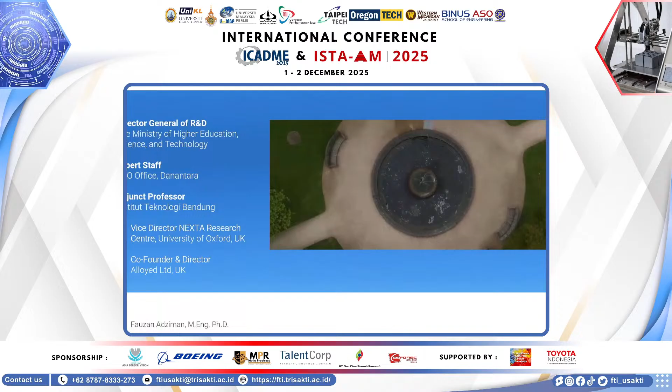I've also been working as an adjunct professor at Institut Teknologi Bandung for the last 8 years. And I could proudly say that I was appointed first by Professor Kadarsah, now the rector of Trisakti, when he was rector of ITB. It might be useful as well to explain that I co-founded a company in the UK called Alloyed, a company focusing on new discovery of materials, specifically metals, and also working deeply in the area of additive manufacturing. So this is a topic of my enthusiasm and interest as well.

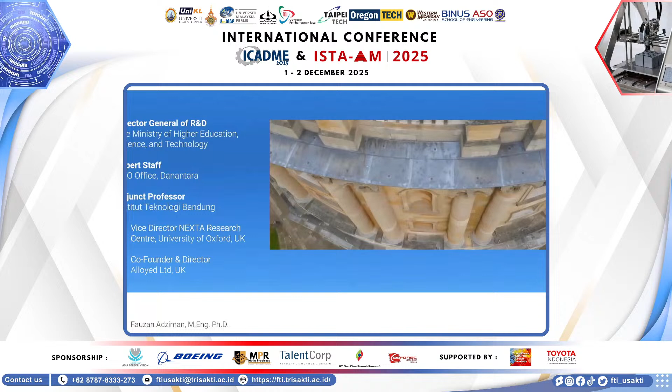So it is a shame that I'm not able to join, but hopefully next time, when the schedule is not clashing, I would surely like to have some coffee chat with everyone joining.

Let me start with just a key background why we think 3D printing is important. So 3D printing is identified as a technology that changed very rapidly and in fact could be exponentially. But I think at the same time, due to the rapid change of the technology, ideas, and also development of technologies itself, somehow we may be able to be part of the journey.

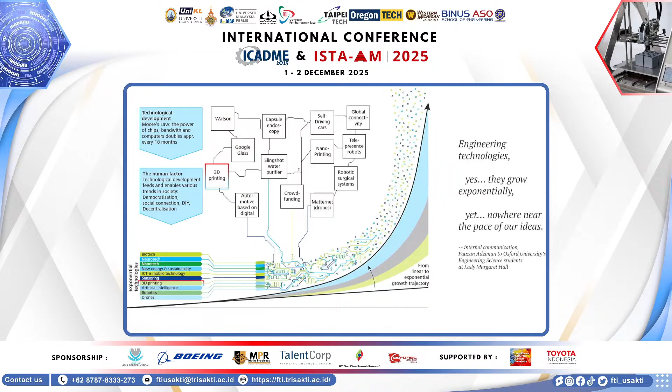So that is key why 3D printing or additive manufacturing could probably transform the way we do R&D. Despite on the application side we understand that in Indonesia it's not well used, especially for metals, the technology transfer and the skills that we could build through additive manufacturing could be impactful for the society.

And the way we see frontier technologies in Indonesia, especially in the development of the ecosystem, at MoHEST, our Ministry of Higher Education, Science and Technology, we built 4 key strategies. Again, we do have opportunities and also challenges at the same time. A key opportunity for Indonesia is by 2045, 65% of our population will be in the productive age group. Which means that we will have sufficient inertia to move our ship towards advanced countries.

But we do have a key challenge, especially on total factor productivity, which may stall the way we develop things if we don't strategically put intention and our policy correctly. So for that reason, what we are describing here is how we build Indonesia's knowledge-based economy. For so long Indonesia in the past was based on an agricultural economy, and now we are shifting too fast, focusing on services. So there is a big gap in between, which is manufacturing.

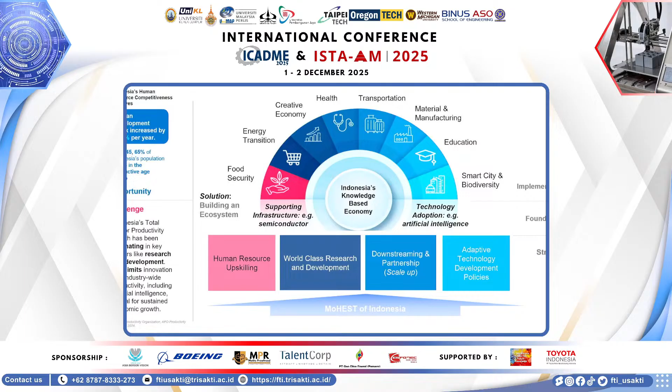And manufacturing itself has been moving fast as well. In the past, big companies were developing big manufacturing facilities, but about 10 years ago in Europe, flexible manufacturing became more and more important. Even in Japan, it started in the 90s and early 2000s. And then additive manufacturing started to kick off as well, where the economics of scale of additive manufacturing became more and more relevant. Now, how do we see additive manufacturing itself?

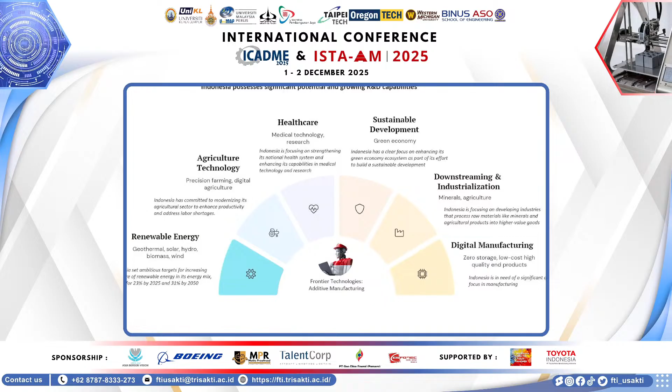So additive manufacturing could assist a number of key developments. We would like to treat it as a frontier technology, because manufacturing itself will bring a number of contributions, not only to manufacturing, but also to, say, renewable energy, agriculture technology, healthcare, and so forth. So this is where we see why we need to invest in how material and manufacturing together as an ecosystem could be a bridge to the key movement in Indonesia, where we want to shift from an extractive economy towards a more product-based economy.

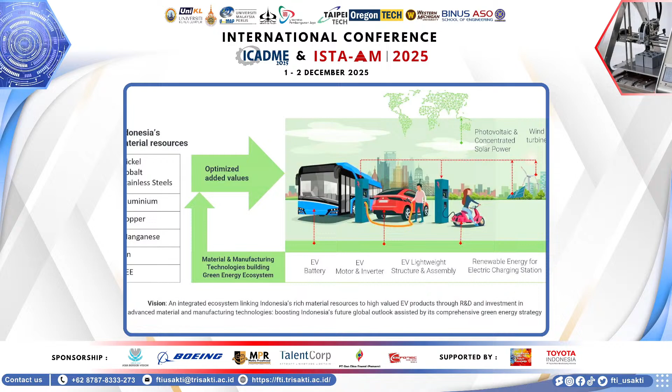So on the left-hand side, we have a pretty abundant state of material resources. And at the same time, on the right-hand side, Indonesia, with our population, has pretty large markets as a consumer of EVs, motors, inverters, and of course electric charging stations, and so forth. So this ecosystem is growing very fast in Indonesia. And material and manufacturing become very key, and we would like to develop them within the country.

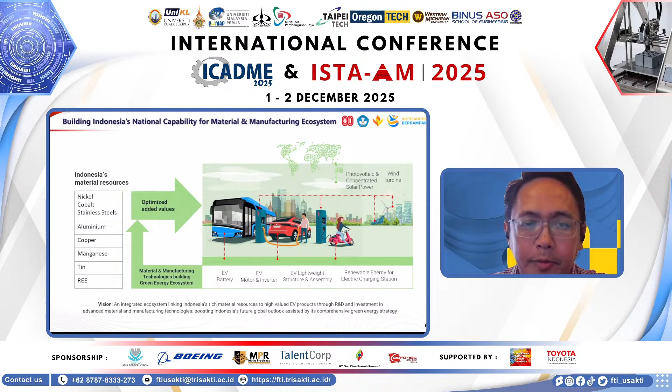Of course, we cannot develop alone, so we need to collaborate, but at least we need to be strategic on development within the country to optimize the added value of our investment, of our research and development, and also talent development. Now, these are just some examples. I'll go through a few examples of applications of additive manufacturing, which seems to be the key underlying subject of the conference.

So on the right-hand side, if we break down a few key ones, say here just the EV ecosystem, it's not only EV in terms of cars and motor, inverter, battery, but we are also talking of the energy flow through this. So PV, CSP, wind turbines, some of these are now 3D printed. And we see the benefit of the value supply chain that could be added to this ecosystem is pretty massive. And it's all about how we can really position ourselves to use the technologies with the right demand and supply chain.

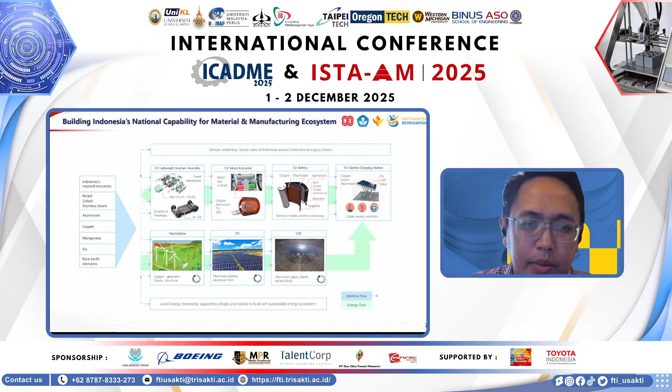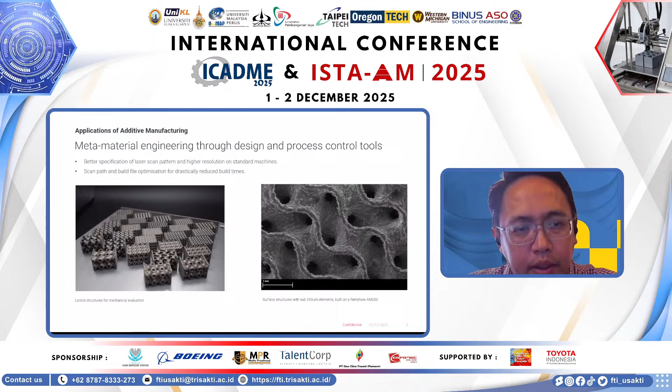So as you can see, there's a lateral thinking way where applications in aerospace can be used in, say, Ferrari GT. And that is the beauty of additive manufacturing. Once you tackle the technology in one area, you can move to other areas pretty much without too much investment. So I can go through a few applications as soon as we handle how we can print well. On the left-hand side is the technology that we built, in the company based in the UK.

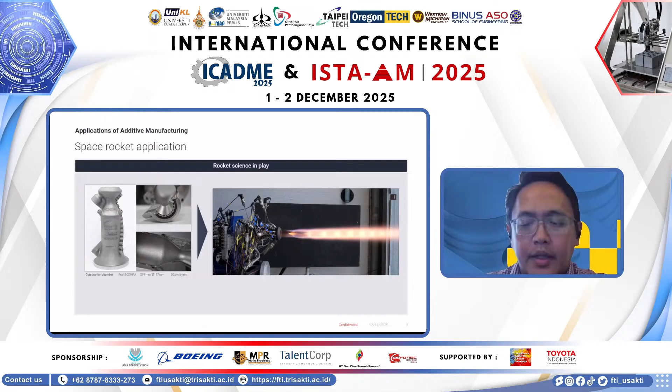And then we also implemented it in biomedical. This is something which I think in Indonesia could be very scalable. The only thing with biomedical is standardization and certification. In the past, it took us 3 years to get the relevant ISO so that we can produce and then it can be used by people.

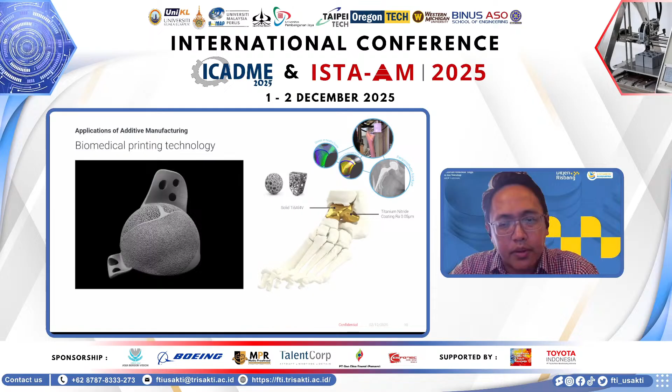And I remember I asked one of our teams how many documents we produced to get the ISO certification. My team counted. We produced around 7,000 documents just to get the ISO certificate for biomedical 3D printing. So along this line, it is not all about technology, but also about industrial standardization that we need to be part of. Something which hopefully we can discuss more in Indonesia and support.

Before joining the ministry, I used to work as an academic at Oxford University, particularly at the Rolls-Royce UTC at Oxford. And I can tell that Rolls-Royce is developing AM pretty intensively. I also worked to develop the GE9X engine for Boeing's 777X. And they also do something similar.

The idea again is that with AM, you cannot just easily use existing materials. You need to modify materials so that your 3D printed parts will be competitive. So research in this area is actually multidimensional. That is exciting and, at the same time, challenging.

So with that, let me bring it back to the policy of our ministry. We shifted the way we do research. In the past, our research was based on topics, on products that we would like to develop. We transformed this so that our research focuses on problems or challenges. We call it a challenge-based ecosystem. By doing so, hopefully we build a multidisciplinary ecosystem within the country.

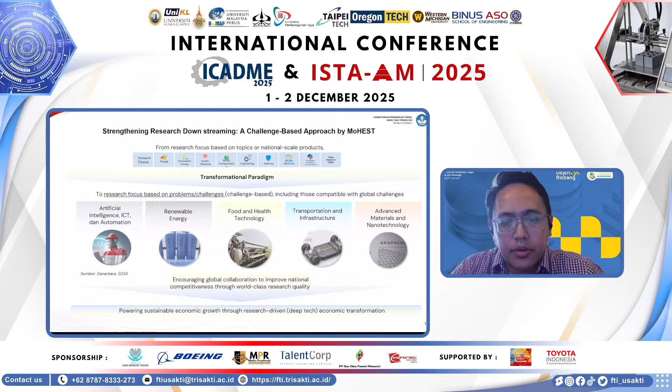And we are putting forward sustainability in our economic growth through research-driven or deep tech economic transformation. Hopefully that explains the background of our policy and the way we see additive manufacturing, in the context of my past experience. Let me just take a few minutes to explain quickly the relevance for discussions, as we are now launching two programs.

We have only two programs for next year, 2026, in the ministry in terms of R&D. First is what we call the priority research program, and second is the strategic research funding program. By priority, we try to improve equity or distribution of research across Indonesia. We have around 3,000 universities under the ministry. In total, in Indonesia, there are around 4,500 universities. So we need to work very well on distribution.

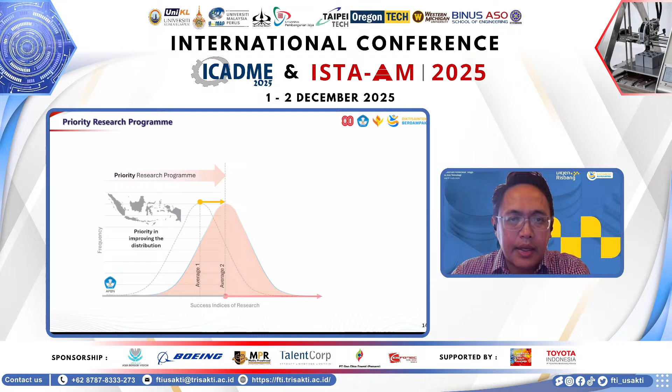The priority research program will also focus on involving as many of our young fellows as possible so that they can really start doing high-quality research. The second is the strategic research program. There we fund much more; in fact, it could be 10 to 15 times higher than the priority research program in funding size. The idea is to be strategic in solving some of the key problems in Indonesia, one of which is advanced manufacturing.

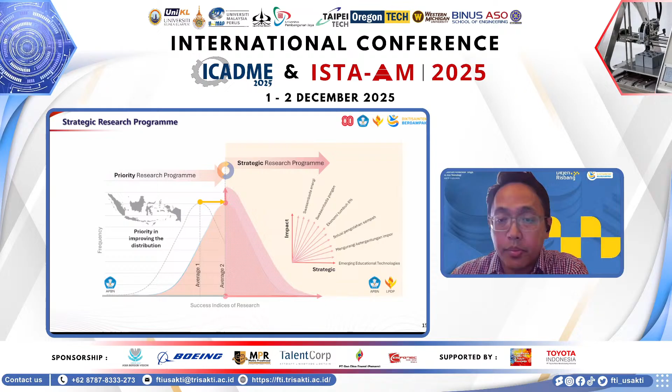We also have key areas around downstream industry research that include hackathons and sandboxing, which is testing. This may be relevant for 3D printing, because once you 3D print, you need to do a lot of testing. Our program can fund up to 2 billion rupiah per product tested for 2 years.

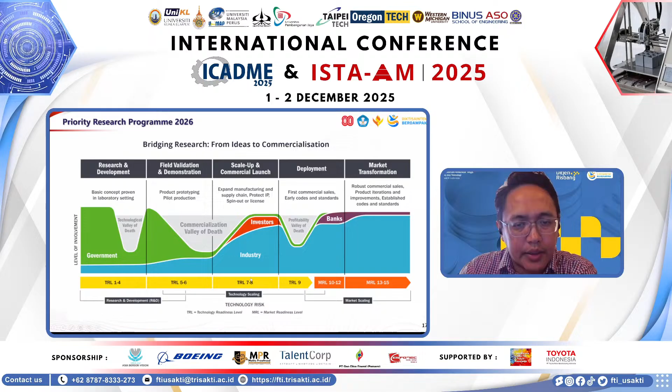Now I jump a little bit. So how do we then see all those funding schemes? We are providing funding schemes from the leftmost side of R&D, so upstream, where governments need to really support. But then we are pushing forward as well higher TRL, supporting in a way that market scaling can be done.

With that in mind, we created this research roadmap for 8 strategic national industries, and I can safely say it's relevant to today's conference, because manufacturing and advanced materials is identified as one of the 8. We also provide information, so if you would like to see research done in Indonesia, you can contact us. This is something that can be accessed publicly.

These are all research that we do for the last 5 years, and we have around 67,000 research across Indonesia. As you can see, if you click, you will see the location of the research team.

I also tried to search AM, additive manufacturing, 3D printing, and in fact we have around 95 research at the moment. So if you compare to 67,000 research that we do, we only have 95 with keywords AM, additive manufacturing, or 3D printing.

This doesn't separate yet metals and non-metals. But if I click one of these within this 20, you'll see that someone is already doing AM for A6061 aluminum, using essentially wire arc additive manufacturing.

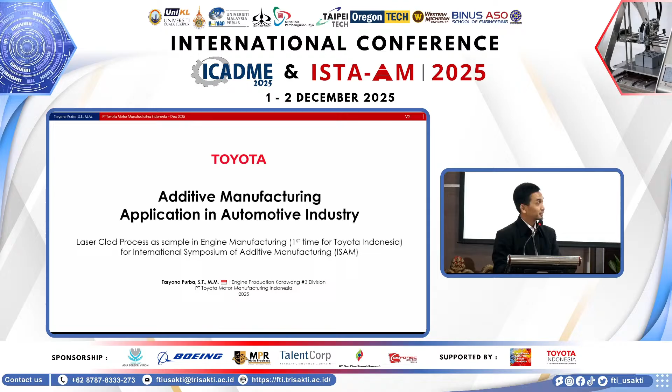This is just about my background. Actually I'm coming from electrical engineering, so I graduated in 2004. This has been a long time. I took my master's degree after 21 years. So this was a very long time, because when I took my master's degree, I wanted to motivate my son and my daughter. So I took my master's degree, but in supply chain management. After I got my master's degree, I think I got addicted to study, and maybe I would like to apply for a doctorate, if there is time and money, of course.

I'm experienced in the engine production division, and now I'm also in charge of the engine production Karawang division.

Maybe this is just an introduction of Toyota Motor Manufacturing. We are producing not only vehicles but also components and engines. 70% of components are now localized, and we are OEM of 7 vehicle types and 4 engine types. Together with Toyota Astra Motor we have around 38 dealers, and also external partners for exporting our products. Our direct employees number currently around 8,000, but including all of the supply chains, this is maybe around more than 300,000 employees. And now we are developing the XEV center to introduce our electrification era.

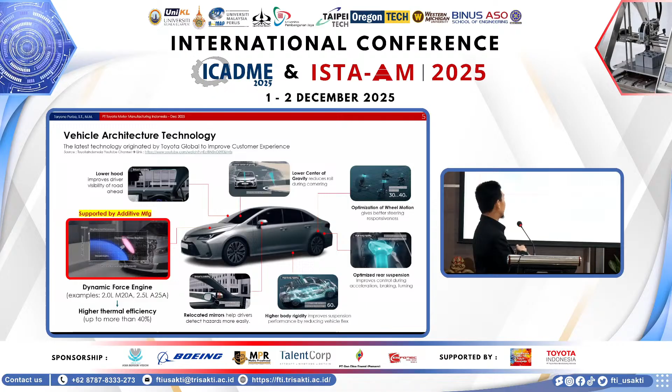Please, next slide. This is a simple video of the dynamic force engine. Let's run the video, please. Is this PDF or PowerPoint? Okay, please tell us about the dynamic force engine.

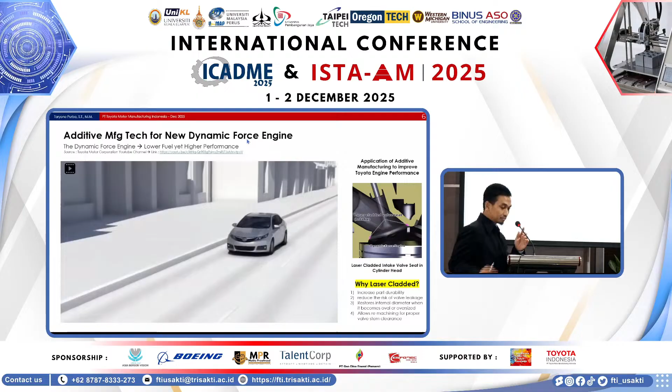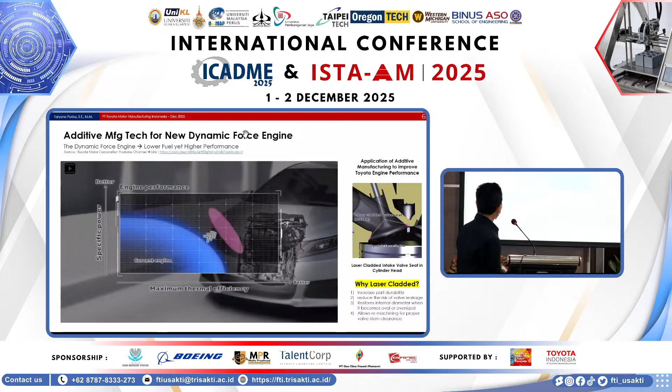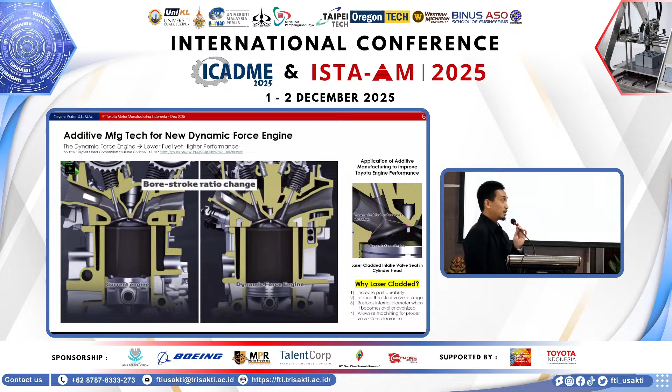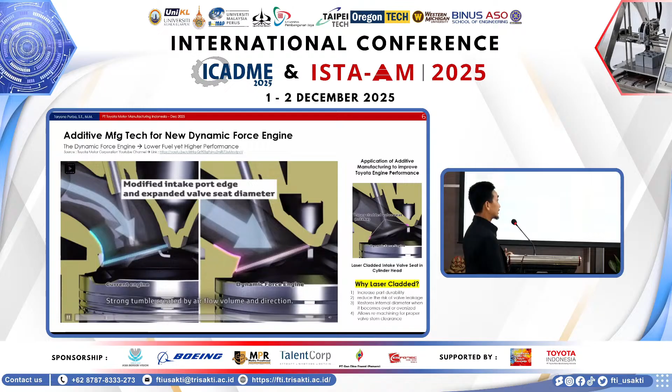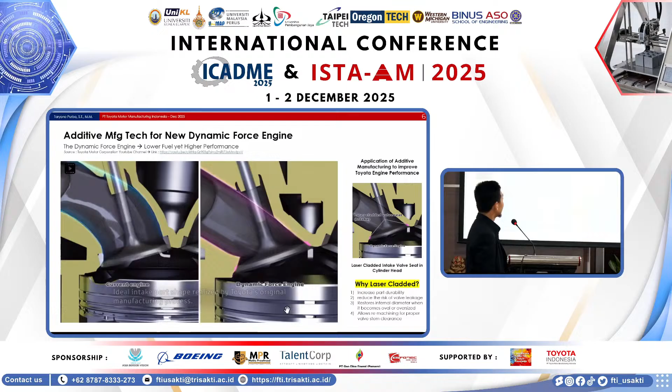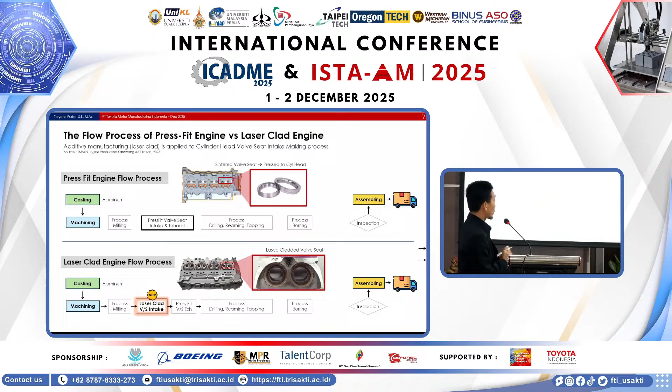Next. So this is one of our manufacturing processes to make the cylinder head, which is actually one component of the engine itself. Usually we utilize press fitting of the valve seat, as I mentioned. But to make the dynamic force engine, this requires laser clad or welding in the valve seat. So we introduce a new process of laser clad valve seat intake. This may be the first time we are introducing this process, so we need a deeper study.

Why does this require laser clad? Because with press fitting there is a sectional area, so fuel cannot directly flow into the combustion chamber. But with laser clad, it's possible to make a direct, non-sectional path for fuel into the combustion chamber. This increases the flow coefficient and allows downsizing of the design. By making smaller engines and reducing cross-sectional patterns, we can improve engine efficiency, making it possible to achieve tumble combustion rather than swirl combustion. That's the benefit of laser clad.

These are the major components of laser cladding. There are four components: the laser oscillator, and then powder feeders to distribute the powder itself.

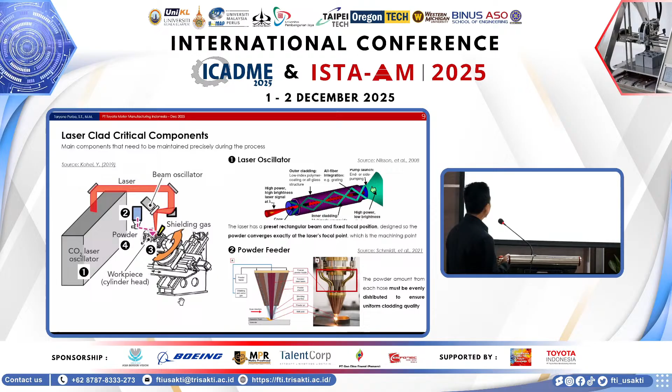The important components are the nozzle for the powder and the powder itself. We have to find the best composition for the powder, because some journals mention it should be a mix between cuprum or alloy, and finding which composition is best.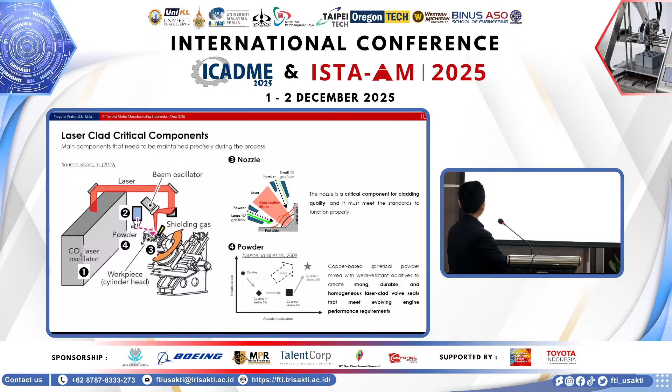But with laser clad we also face many challenges, based on previous experience in our regional country that already produced this engine. For example, non-bonding—there appears to be a lack of unity between the casting layer and the additive material—and also the possibility of cracking. Those are the two main challenges usually faced in this process, so we have prepared some activities to overcome these challenges.

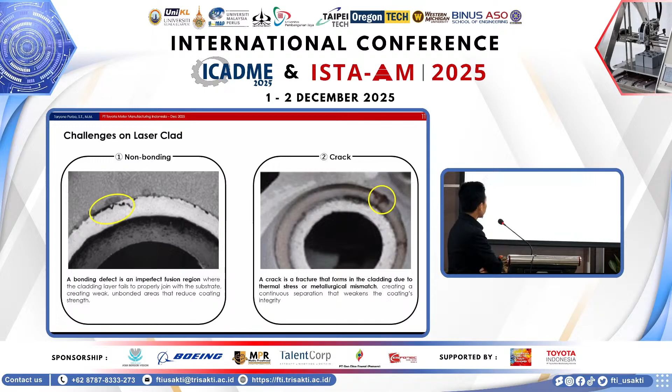For example, for the non-bonding, we have already taken some possibilities of the generating factor, and that's why by knowing the generating factor, we can anticipate or predict what we want to do. Actually, if we see the surface, sometimes non-bonding is distinguished by other factors. This is like porosity or inclusions, but non-bonding usually looks like line defects in our product.

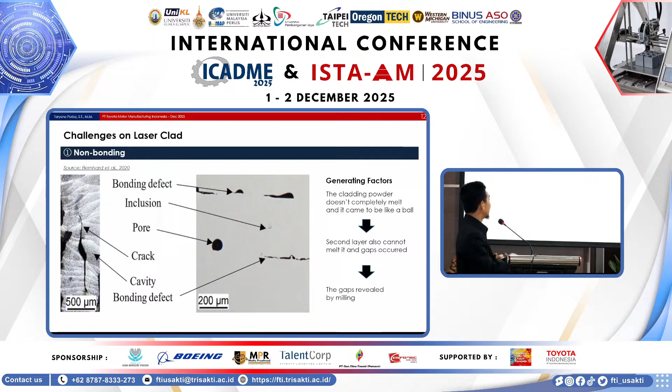Next. And this is for the crack. We already gathered information from our affiliates on some finding issues in some journals. We find some possibilities of cracking, and by knowing these possibilities, we hope we can gather the preventive activities to protect against the defect coming to our line. Okay, next.

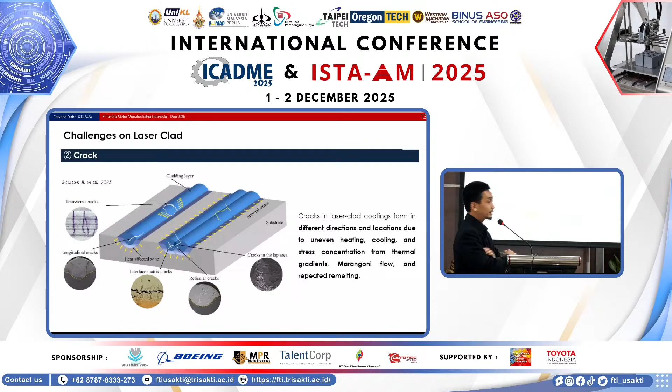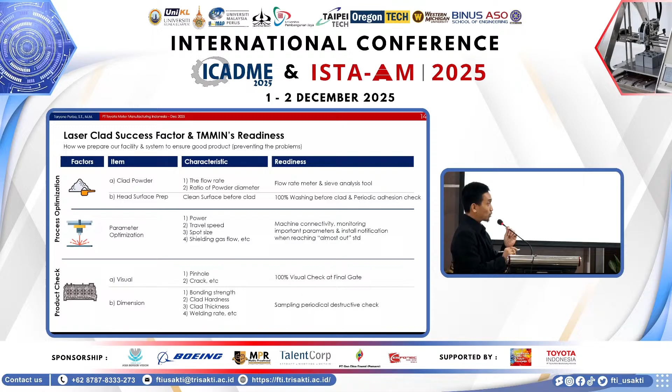And this is the laser clad success factor that we already gathered, and some of our preventive activities to protect against non-bonding and also cracking. And of course, not only in process optimization, we are also conducting product checks, like traceability and data gathering to predict our process trend. Maybe in more detail, we can see the next slide.

For example, to protect against non-bonding, we have to secure our powder material, so we select the coaxial method. Actually, in the laser clad, there are two methods. First is about the outer layers of the powders, but we select the coaxial, meaning the powder is also gathered coming into the nozzles. That is what we would like to use during our process.

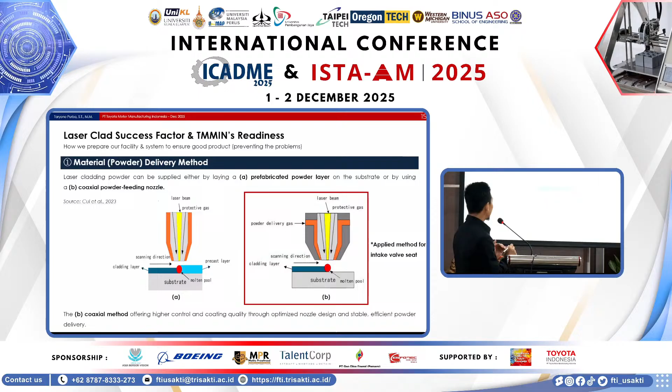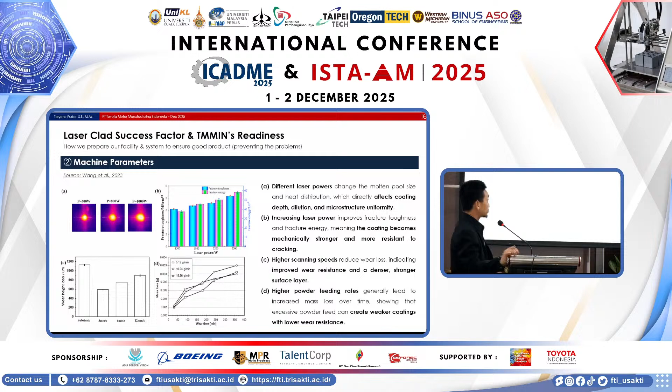Okay, next. And these are some machine parameters. We also gathered from some journals and also the preliminary work of the other plants, such as the power of the laser oscillator, and then the powder compositions. We try to define things like increasing laser power, higher scanning speed, and also the powder feeding rate. Those are some parameters we try to gather to make our good product. Okay, next.

Maybe this is the end of our presentation. Actually, we invite collaboration, as also mentioned by Mr. Fauzan, that innovation is not just science and technology, but collaboration. I think this is enough with our slides. So we invite the triple helix approach.

Usually we just gather information from our mother plants, our regional factory, to get non-defective conditions, but we try to also include STEM, like science, technology, engineering, and mathematics, to provide a good product ourselves. So we are ready to produce the laser clad in the near future this year. I think that's enough of my presentation, and we are open for further collaboration.

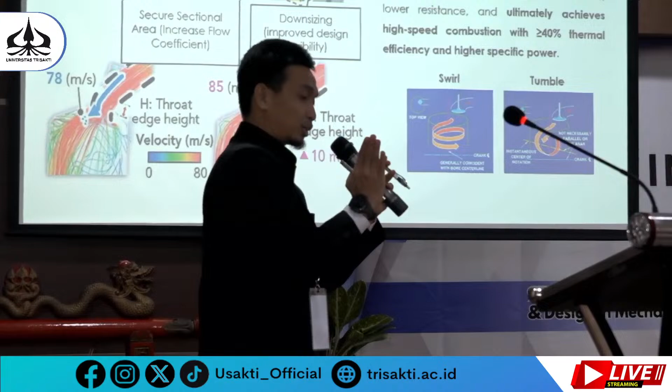This is the valve seat. Actually, this is generated by the press fitting. But for the dynamic force, this is needed to make tumble combustion. If we utilize the press fit, the degree of the valve positioning cannot open. This is too narrow. That's why it can make swirl combustion.

That's why we need to open more, so the gasoline coming from this port goes directly to the chamber. The process that makes it possible is laser clad, because this needs a thin layer. If we utilize the press fit, it cannot be made thin, and this is a very narrow picture.

Actually, if this figure were bigger, we could see that the fuel cannot come directly. Maybe we can see there is a degree here. So by forming the seat utilizing the laser clad, it is possible for the fuel to come to the combustion chamber. That's the laser clad benefit.

And about the second benefit of laser clad. Actually, the benefit of laser clad is making it possible to make the tumble combustion. Because this secures the sectional area and also makes downsizing, it needs just a thin layer of the seat itself. If we make it by press fit, this is maybe too tough. It cannot be a thin layer.

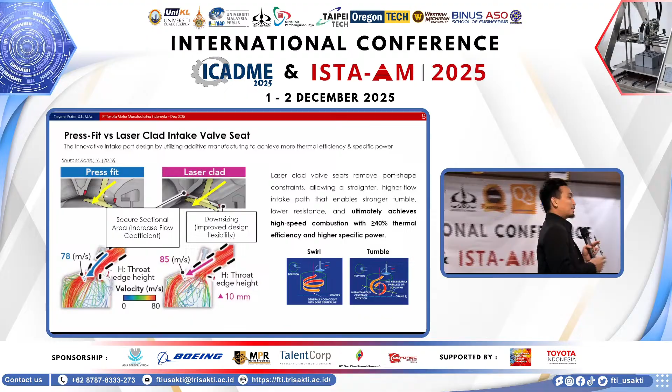That's maybe it, Pak Tono. Hopefully you can understand. That's maybe the difference between academic and practical. Maybe sorry, I cannot explain further. But we have proven it in our performance. This is mentioned as 40% of our performance engines.

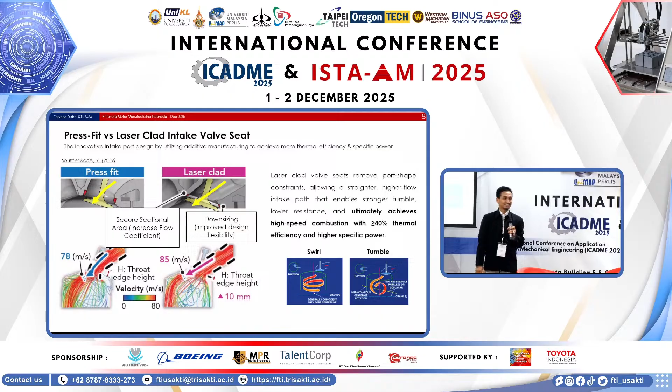Okay. Yes, welcome. Thank you, Pak Tono. I hope that answers your question, Pak. Thank you, Pak Tono. Okay. Maybe I take one more question from the audience.

Assalamualaikum warahmatullahi wabarakatuh. Thank you very much for the opportunity. Thank you for your presentation, Pak. It gives us many insights regarding automotive technology.

My comment is on the improvement of valve seats from press fit to laser clad. Very interesting. Just like Bapak said, it improves the fluid flow in the internal combustion engine, so the thermal efficiency of the engine will increase. My question is, how about the durability of the laser clad itself, compared to the common technology like valve seats using noble alloy, like nickel-based alloy?

Maybe the common issue in valve seats is related to wear, because of friction and impact to the valve and valve seats. Then the second question is regarding our common issue of ethanol content in fuel. How about the durability of the newly developed laser clad valve seat to the ethanol content in the fuel, compared to our current technology using nickel-based or more noble valve seats?

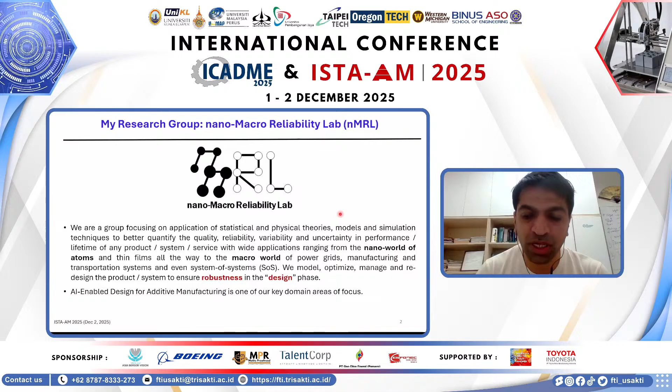And we also play an important role in seeing how machine learning and AI can actually play an important role in design for additive manufacturing in my group. So I think Dr. Zaki has already introduced my background to everyone. So my research is basically on condition health monitoring, prognostics, and physics of failure, design for additive manufacturing, as well as materials design for micro and nano electronic devices.

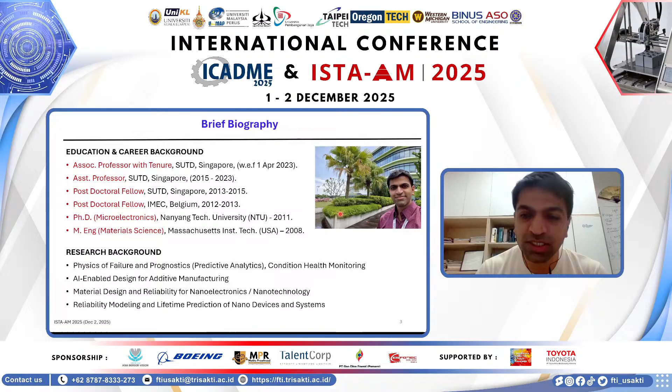So why study uncertainty quantification in metal additive manufacturing? I just want to highlight that the focus of my talk today is only on metal additive manufacturing. And in particular, we're just going to look at laser powder bed fusion as an example. But the same approach or framework that we use here can also be applied for other metal additive manufacturing processes, and also for polymer AM processes with slight variations in the framework.

So we all know that process variations are part and parcel of any manufacturing process. We can't completely get over it. So it's important for us to understand how things that we cannot fully control, be it laser power or scan speed or hatch spacing and so on, the variations in the process parameters will definitely have an impact on the variations in the microstructure of a material, and that microstructure variations will also affect its mechanical properties.

So we want to build a framework that can map or quantify the variability of process parameters to the variability of the microstructure, and in turn quantify the impact of variability of the microstructure on the variability of the mechanical properties. So that is basically the process, structure, property, performance full workflow. That is what we are trying to build. We're trying to build a framework that can completely help us understand the relationships of all the different things, process, structure, property, and performance of the additive manufacturing process through an uncertainty quantification modeling framework.

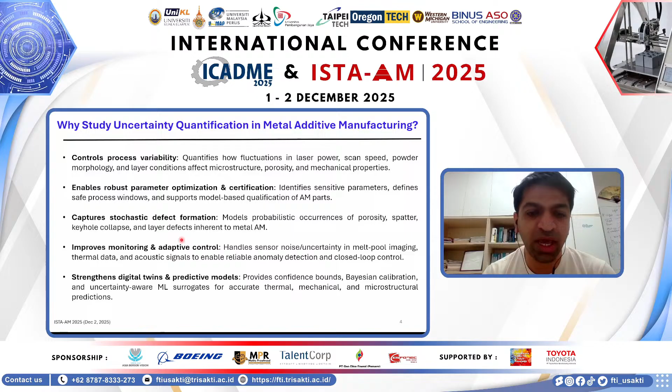So, let me just go ahead to introduce the specific process that we are looking at. So we have a digital twin that is specifically built by our collaborators at Institute of High Performance Computing in A*STAR. A*STAR is Singapore's national research agency called Agency for Science, Technology and Research. And our research group works with Institute of High Performance Computing in A*STAR in Singapore. And they have an additive manufacturing digital twin that has already been built for the laser powder bed fusion process.

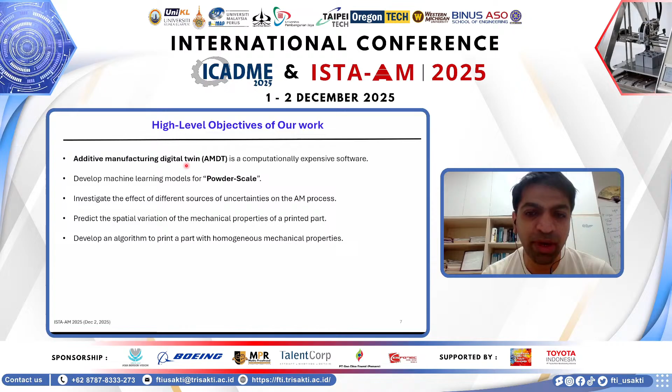And we are trying to take the digital twin and then further build machine learning platforms into it and see how a combination of the digital twin and machine learning together can help us better quantify the uncertainties in the process and how that can also help us optimize the process in the near future. So this is a framework that we have.

So we have many process parameters in the AM process. It could be the laser scan speed, it could be the laser power, it could be the hatch spacing, and many other parameters. We have the geometry of the part that you want to print, which plays a very important role, because whether the geometry is a vertical cylinder or a horizontal cylinder or a cube or a pyramid or whatever shape it is, the geometry has a very important role to play in the entire thermal history that the 3D printed device is going to experience.

So geometry plays a very critical role in the whole simulation process to look at the thermal effects of it. And of course, material properties, which include thermal conductivity, specific heat capacity, and many other properties. So we look at the combination of all these different design variables and see what impact they have on the thermal simulation at the part scale, when you have the part.

And then from this part scale simulation, we take one single metric that describes the thermal history that has been experienced by the whole part, and that metric is called boundary temperature. And we then use this boundary temperature as an important boundary condition in the powder scale simulations when we do a multi-scale simulation of the powder bed fusion process, including the melt pool, the grain growth, the solidification of the melt pool, and so on.

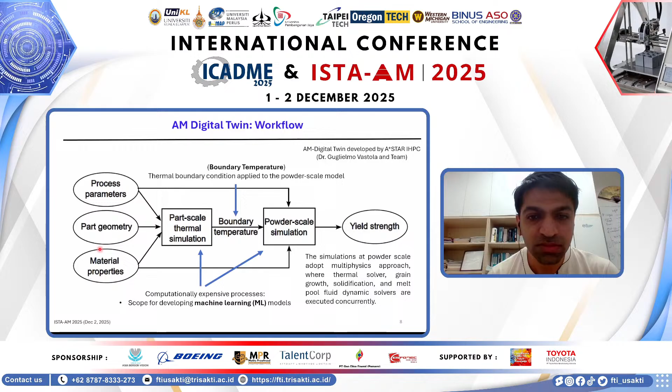So we want to use machine learning tools to increase the speed of this simulation by as much as 1,000 to 10,000 times, with a small compromise in the accuracy of 2 to 3%. So we will of course have some compromise to make in machine learning or reduced order models for additive manufacturing, but we have ensured that the accuracy drop is only 2 to 3%. So that is far less compared to the improvement you get in efficiency of 10^3 to 10^4 times. So this is the entire framework that we have been working on with our collaborators in IHPC.

So we have specific heat capacity, density of the material, and thermal conductivity, which are the three material properties that we are varying. And then we will look at the impact of this on the thermal simulations at the part scale. And then we will export the boundary temperature distribution from this simulation here. And this boundary temperature will then be an input to simulate how the powder bed fusion process works, how the melt pool is generated, how the solidification happens, how the grain growth happens, and so on.

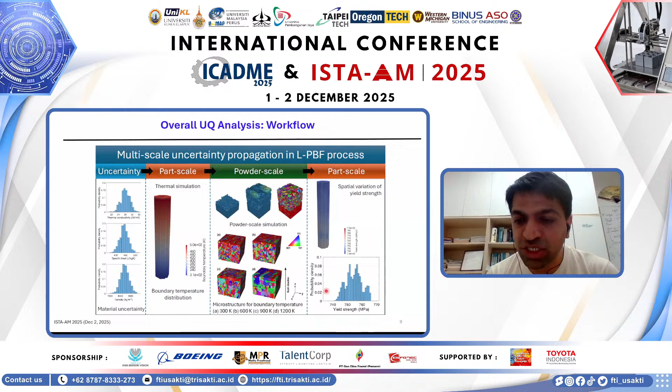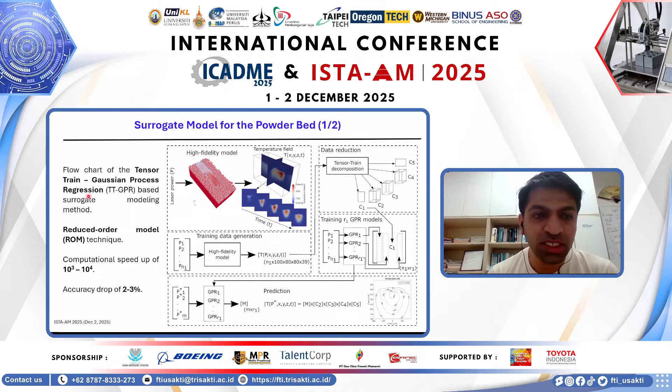And for different temperatures, we will have these kinds of microstructures. And these microstructures will then be used to estimate the yield strength of the material and the distribution of the yield strength as well. So we have built a surrogate model, or a machine learning model, for this entire process. And that has helped us increase the computational speed by up to 10^4 times, while the accuracy drop is only 2 to 3%. And this model has been quite helpful for us to do the optimization of the whole process as well.

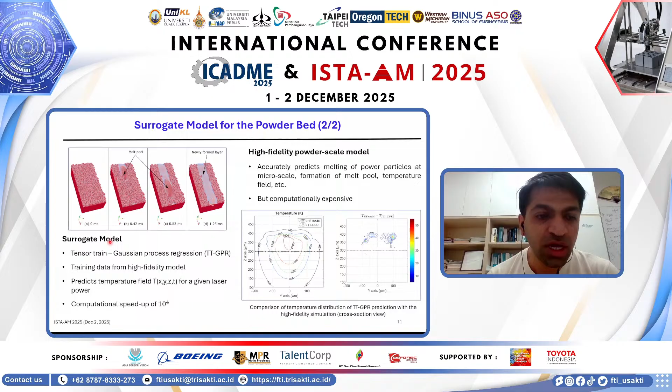Well, I don't have the time to go through the details of this process, but I will definitely be able to share the article with you if you're interested to know more about how this machine learning model was built using tensor train and Gaussian process regression.

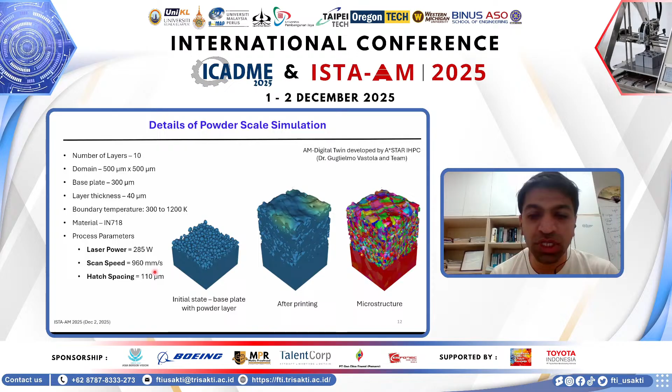And these are the details of the powder bed simulation that we have carried out together with our collaborators at IHPC. These are the typical laser power, scanning speed and hatch spacing. And of course, these are just typical values. We have varied our process parameters in a range of plus minus 10 to 20% of these values to see how they impact the overall mechanical property results, both in terms of mean and the variance as well. So here's an example.

Here's one of the results of the simulation that talks about how the boundary temperature of the 3D printed part has an impact on the thermal history, which is the temperature versus time graph that you see, and also the cooling rates. So you can see that when the boundary temperature is very high, the cooling rates tend to be very low, which means that it takes a long time to cool. So therefore, the grain sizes are much bigger. The average grain size is bigger.

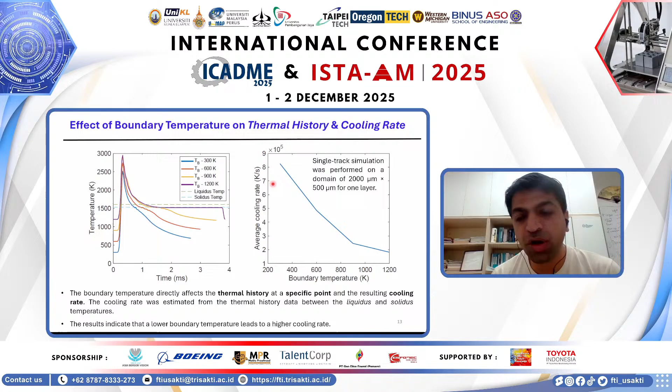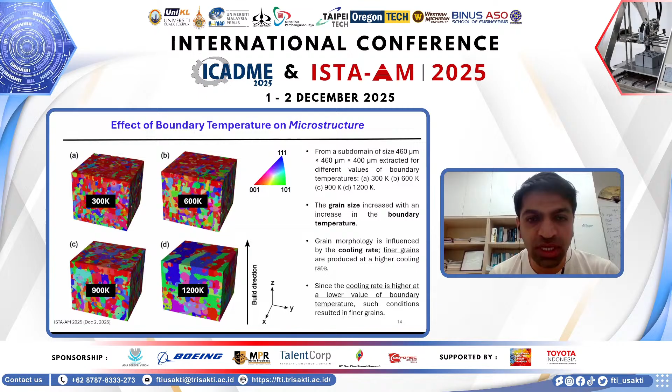While if the boundary temperature is much lower, it means that the cooling rate is higher, which means that it is likely that your grains are going to be much smaller in size in your entire microstructure. And these grain sizes will then have an impact on the mechanical property of the 3D printed device as well. So here are 4 grain structure maps you can see for 4 different temperatures, ranging from 300 Kelvin to 1200 Kelvin. And you can clearly see that the grains are much bigger in size for the higher temperatures, while they are much smaller and equal in size for the smaller temperature simulation results.

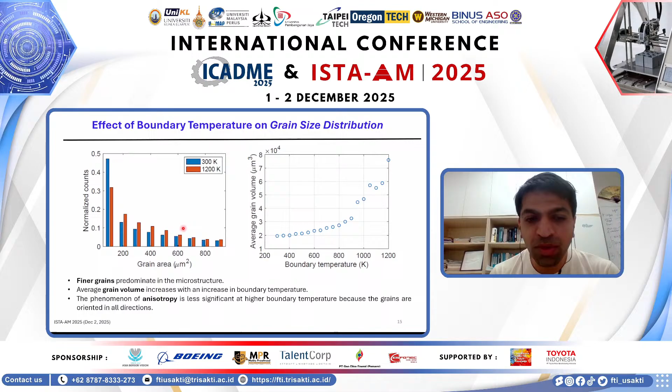And then we map all these grain structures into the statistical distributions. We look at the grain area distribution and the grain volume. And all of this then gets implemented in a homogenization model that helps us estimate the stress strain curves for different process parameter combinations. And from these stress strain curves, we finally estimate the yield strength. And this yield strength is the final performance metric that we care about.

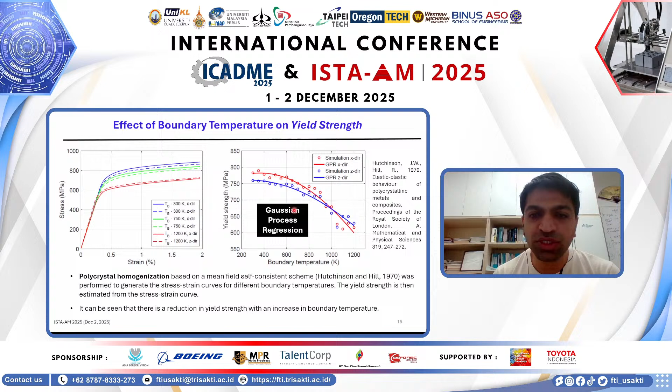The yield strength as a function of boundary temperature is what we show here. You can clearly see that as the boundary temperature increases, the yield strength logically decreases in value. And the trend is of course not a linear trend, but there is a non-linear trend here, and we have used a simple machine learning model called Gaussian process regression to map this dependency, which will then be used later for our optimization routines as well.

So to illustrate the impact that this can have on a real use case scenario, we have considered a very simple use case here, where we are trying to 3D print a cylindrical bar. In one case, we are printing the cylindrical bar on a base plate in a horizontal direction, so it's horizontally placed on the base plate. While the second one is the same cylindrical bar with the same dimensions, but printed in a vertical direction.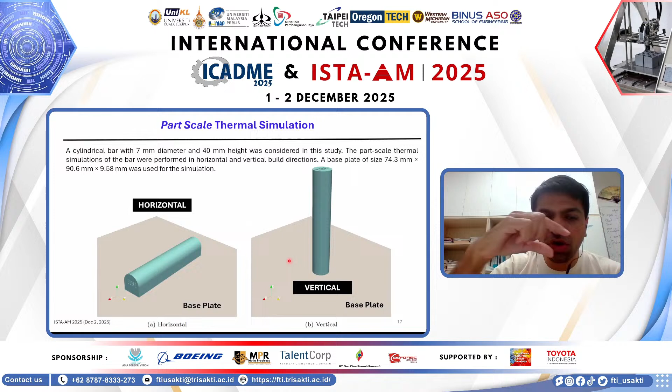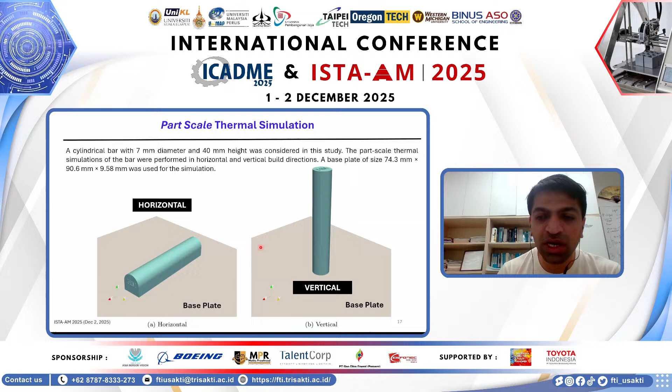So the difference here is that for the horizontal direction, there is a huge base plate. There's a large contact area between the metal printed device and the base plate. So there's sufficient area for heat to be dissipated from the 3D printed stack. In the vertical growth situation, the interfacial area of contact with the base plate is much smaller, and therefore it's very difficult for heat to be dissipated during the melt pool solidification process. Therefore, we will see a big change in the mechanical properties for these 2 scenarios, depending on whether the growth is horizontal or vertical for the same cylinder.

So going through the whole simulation routine, you can see that the boundary temperature is plotted in this figure here. You can see that the boundary temperature is quite close to 300 Kelvin for the horizontal bar. Even though heat is generated using the laser powder bed fusion process, there is enough surface area in the base plate to carry heat away from the sample. That's why the temperature is quite uniform and quite low here.

But in the context of a vertical cylinder that's being printed, you can see that the temperature gradually increases towards the higher levels of the bar, because it's difficult for heat to be dissipated through the narrow surface contact area with the base plate.

Sorry, Naga, to interrupt. You have 5 more minutes for the talk. Sure. Thanks.

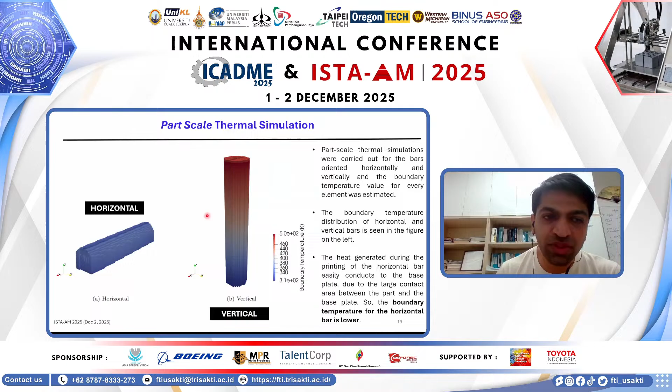And then, these results that we have of the thermal map of the horizontal and vertical bars are then extrapolated to look at the yield strength distribution of the horizontal and vertical bar. While they look the same in color, you can see there's a small variation in the blue color here. So the yield strength of an element in the higher end of the cylindrical bar is not the same as the one in the lower end. It is actually different. So the higher end of the bars have a lower yield strength compared to the lower end of the vertical bar.

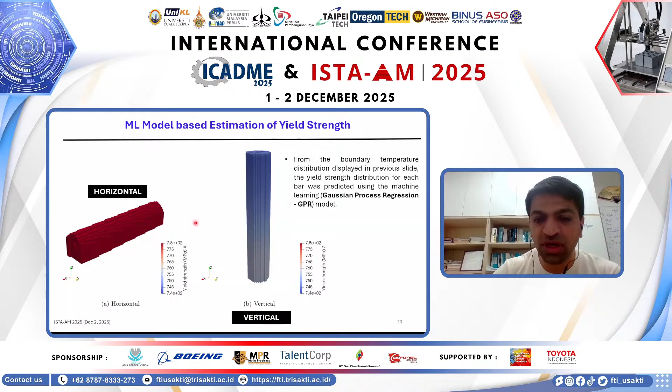But in the horizontal case, it looks uniform, as we expect, because of the thermal dissipation of the heat. And then we bring in the other quantification here by looking at how the material properties have an impact on this boundary temperature.

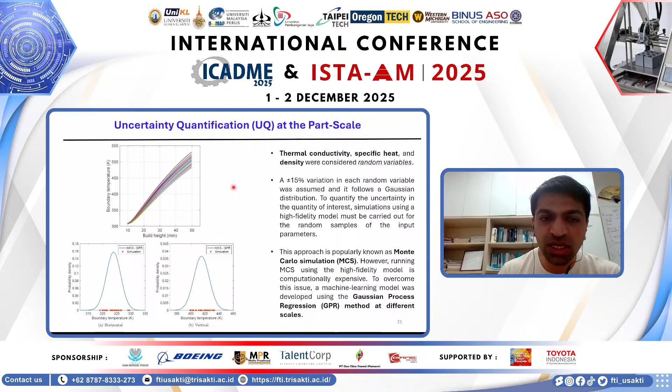And how the variation in boundary temperature will have an impact on the variation in yield strength. So the properties we vary are thermal conductivity, specific heat, and material density. Then we run our Monte Carlo simulations to see how the yield strength distribution changes with boundary temperature, both along the x-axis for the horizontal bar and along the z-axis for the vertical bar.

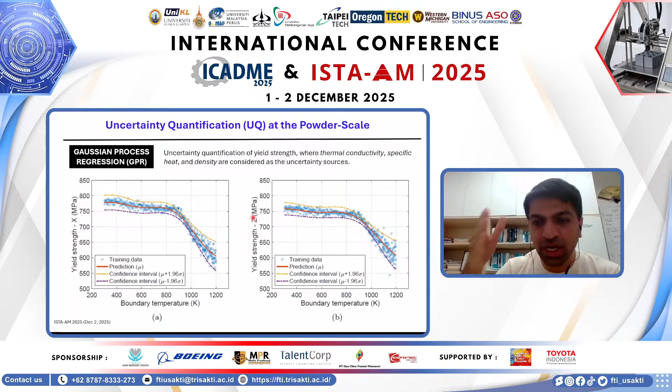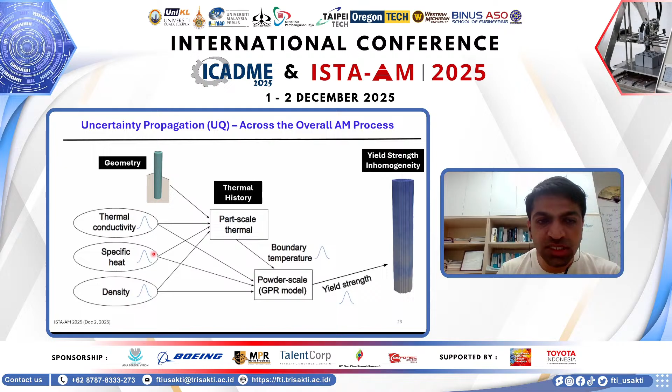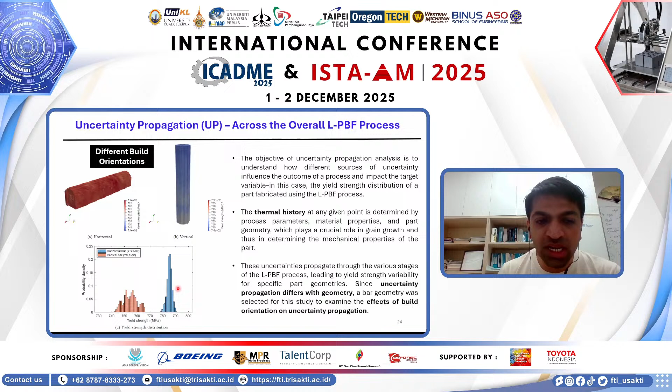So with this kind of analysis, this is basically what we wanted at the end of the day. We can see what the mean is, and also what the variation of the mechanical properties is.

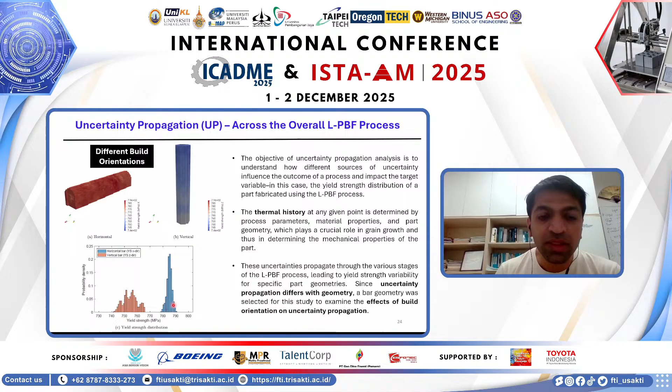With these two histograms, you can then work backwards using the machine learning framework to see what the real design variable properties should be, what the optimal material properties or process parameter conditions should be to minimize the variation and maximize the yield strength you want to achieve. That is what we want to achieve as part of the inverse design framework.

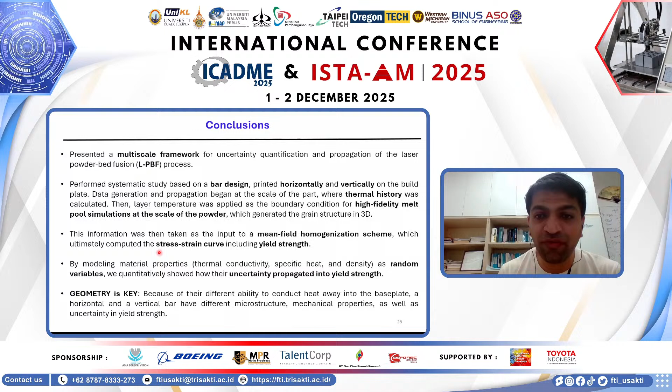So to conclude my talk, I want to mention again that uncertainty quantification is an important part of qualifying a manufacturing process for metal additive manufacturing, and it plays a significant role in inverse design, optimization, and digital certification of AM design plans in the future, because we can't be manufacturing every new 3D printed CAD design for validation.

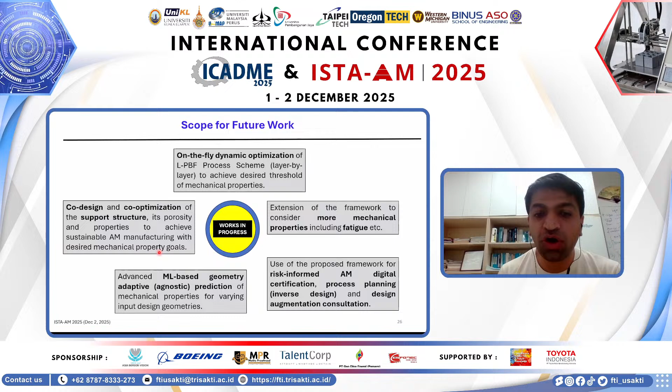So we want to be able to digitally certify an AM process and an AM design through this machine learning and digital twin framework in the future, hoping that it will significantly reduce cost and time for designs to be validated and manufactured for better use at the end of the day.